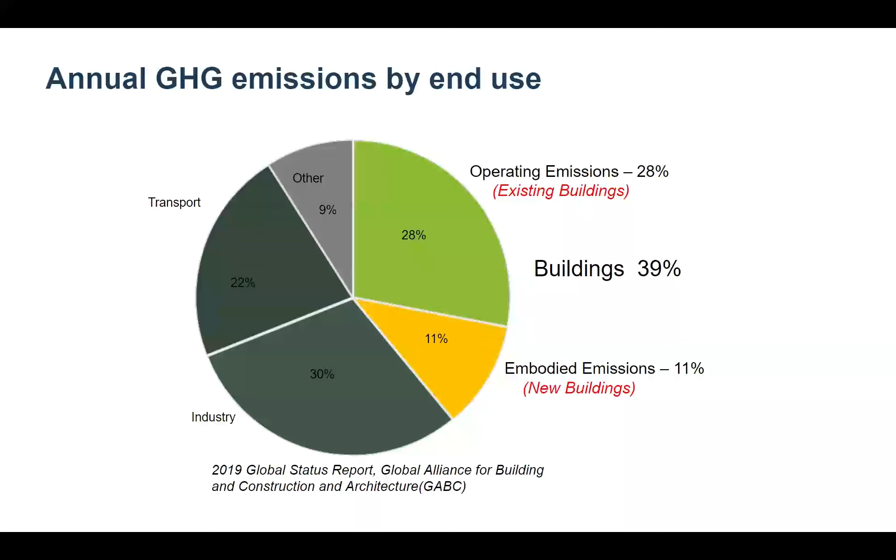So existing buildings have a really big impact, not to mention that we have a ton of buildings. We currently have 235 billion square meters of buildings, and each year we're adding another 6 billion square meters to that. So the existing buildings are not very efficient. We can't afford to replace all of them. We can't afford to leave them alone.

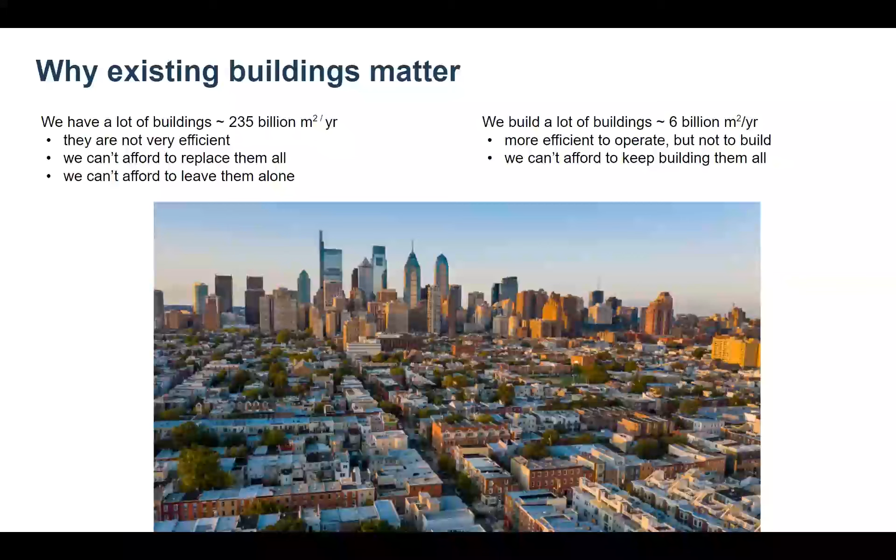The new buildings add new embodied carbon. So obviously it's very beneficial to preserve old buildings and reuse them as much as possible in terms of embodied carbon, but also for economic benefits. So you can see here on the left of the chart is new buildings. So new buildings contribute about 11% to global GHG emissions for embodied carbon, but only less than 0.05% of operational carbon, because new buildings are much more efficient in terms of their mechanical systems and emissions.

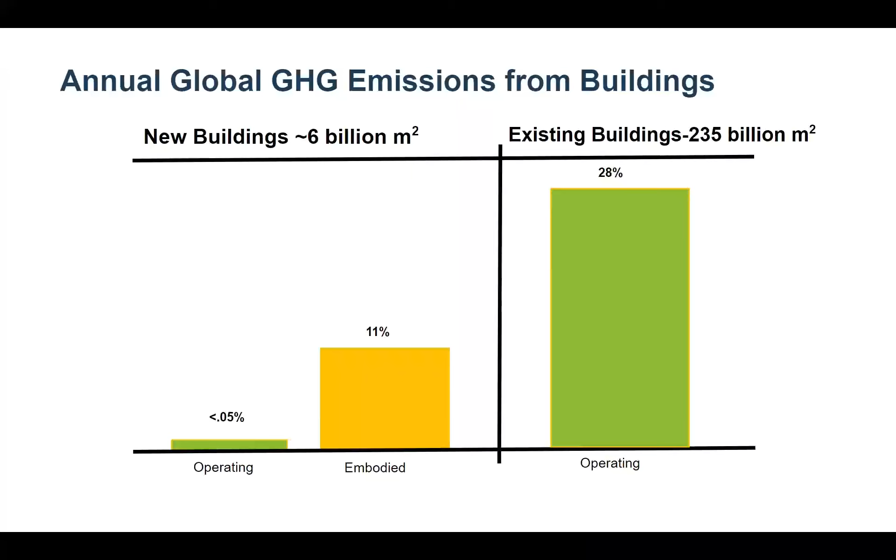Existing buildings, on the other hand, because they have old, outdated mechanical systems and maybe are not as efficiently run, have much higher operating emissions. They're contributing a big chunk of, in fact, all of that 28% of emissions. So now I'll hand it off to Irina to walk through this compliance pathway in detail with you.

Hello, everyone. So Sarah, next slide, please. So as Abida said, my name is Irina Brausman, and I'm a supervising architect with California Building Standards Commission. And I'm here today to talk a bit about building reuse scope. And even though it was presented as a third pathway in this series, we call it Pathway 1. So I will keep calling this Pathway 1 for this presentation.

So the scope of building reuse regulations is basically identical with the scope for two other pathways, the whole building LCA and the prescriptive GWP compliance. And the only difference is that the building reuse option is obviously not available to new buildings or buildings where added area is significantly bigger than the existing area. And these regulations are only applicable to quite large-scale projects.

So effective in July, that will be 100,000 square feet and greater for non-residential projects within BSC authority, and 50K and greater for public schools and community colleges. It will drop for non-residential buildings within BSC authority to 50,000 square feet, but that will happen 18 months after this July. So there is time for adjusting.

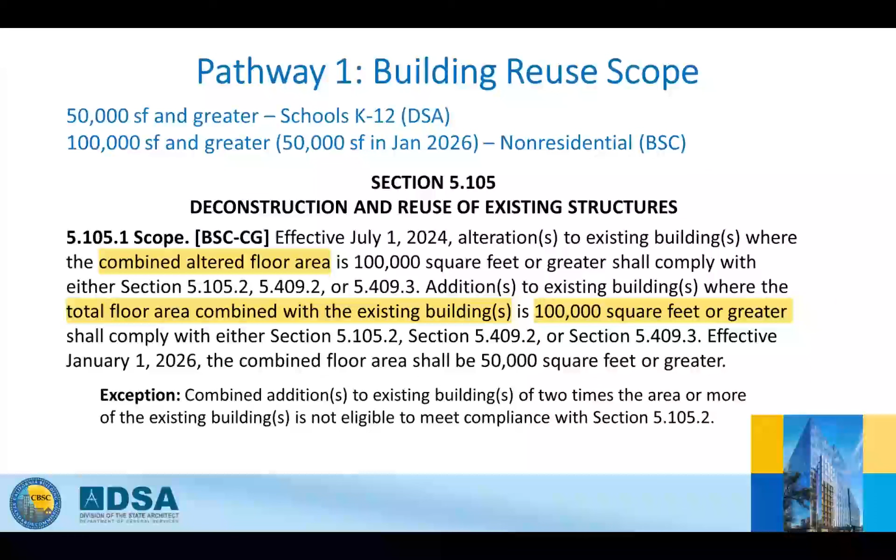And several things to note on this slide. So the project area considered in the application of these regulations: for alterations, it's combined altered floor area. And for additions, it's actually total floor area combined with the existing building. And that is really important to remember when we look at the examples in the next slides. So next slide, please.

So with the calculations, we combine altered floor area of the two suites, and we get the result of 110,000 square feet, basically 50K plus 60K, and that is over the 100K threshold. So the work in both altered suites has to comply with either one of the three available pathways. It can comply with building reuse, whole building LCA, or product GWP compliance. The next slide.

On example number 2, we have a commercial building of 30,000 square feet, which is proposed to have two additions, 25,000 square feet and 35,000. So in calculations here, the total area of the additions plus the area of the existing building is 90,000 square feet, which is less than the 100K threshold, meaning the project is not required to comply with any of those regulations. So if the design team decides to comply with them, they are of course welcome, but it's not required. Next slide, please.

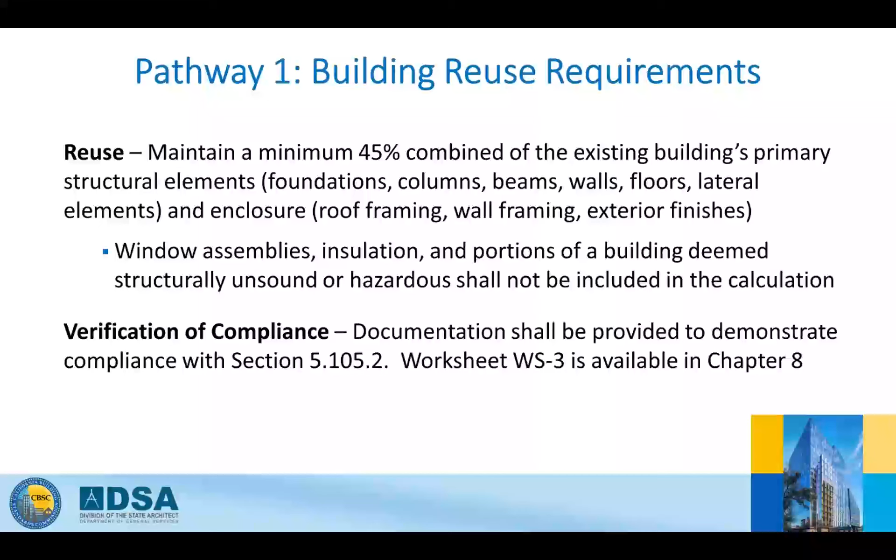So here is example number 1 on how to demonstrate compliance of the project. We have an office building of 50,000 square feet that is planned for the following scope of work. There are alterations to 35,000 square feet that do not affect the building primary structural elements. The existing building enclosure is mostly maintained, but existing window assemblies and insulation are being replaced. Then there are additions of 10,000 square feet and 80,000 square feet. And last, 15,000 square feet of existing structure is proposed to be demolished to result in a U shape of the building to provide more natural light.

So the first step calculations are to determine if the project actually has to comply with the regulations. To do that, we take the total area of the additions combined with the existing building area, and the result is 140,000 square feet. So this project is required to comply with one of the 3 compliance pathways available. Next slide.

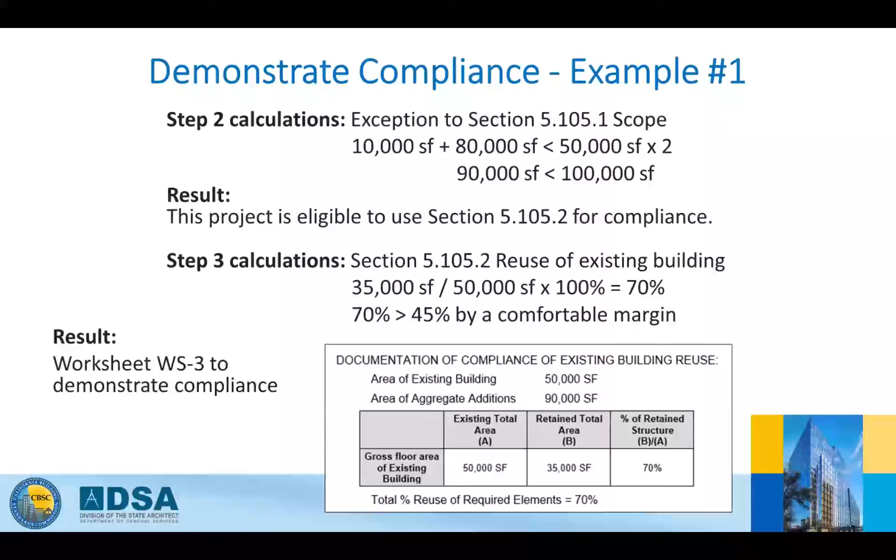So here we have example 2 for demonstration of compliance. We have an office building of 50,000 square feet, and that's planned for the following scope of work: alterations to 25,000 square feet that do not affect the building primary structural elements, additions of 10,000 square feet and 40,000 square feet, and demolition of 25,000 square feet of the building.

And again, same steps. Step 1, we determine if the project needs to comply. The total of the added area combined with the existing building area equals 100,000 square feet. 50K plus 10K plus 40K, basically. And the project is required to comply with either one of the compliance pathways available. Next slide, please.

So here in step 2 calculations, we again determine if a building reuse option is available for this project. As the combined added area equals 50,000 square feet, which is not greater than double the area of the existing building, the project is eligible to use the building reuse option for compliance.

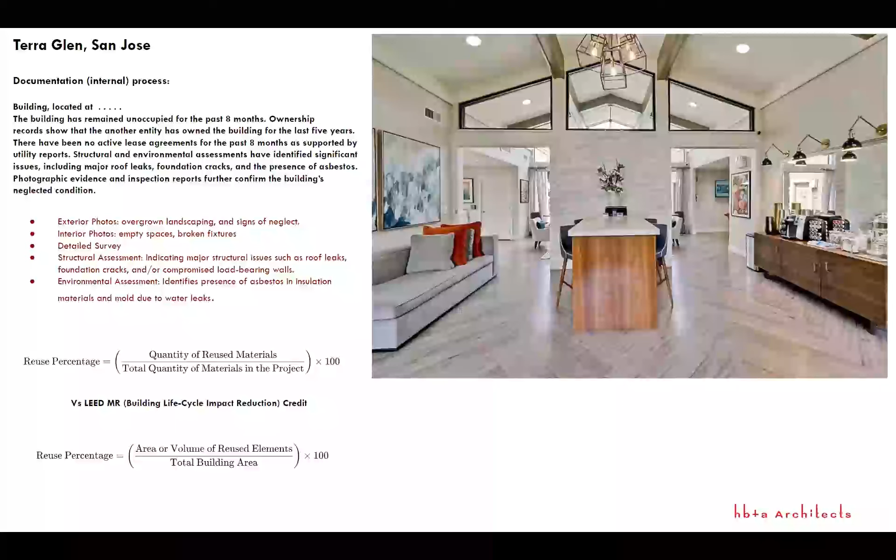This is another example of an original construction from 1971. The existing occupancy is storage. It was a warehouse construction that was converted from an S to a B occupancy. It's a typical tilt-up concrete construction with large bays on a 6-acre site with a 4-ply built-up roof. And it supported the demand for commercial spaces in the area.

And as we all know, going from storage to commercial, some of the problems we dealt with were comprehensive full compliance with accessibility codes, which does become a bit of a cost implication for clients. Energy updates for Title 24. Also, ventilation rates were improved based on ASHRAE 62.1, just to improve the indoor air quality of the space so it can have occupants. And with the entire 100% of the structure, the tilt-up concrete was used along with the flooring. Next slide, please.

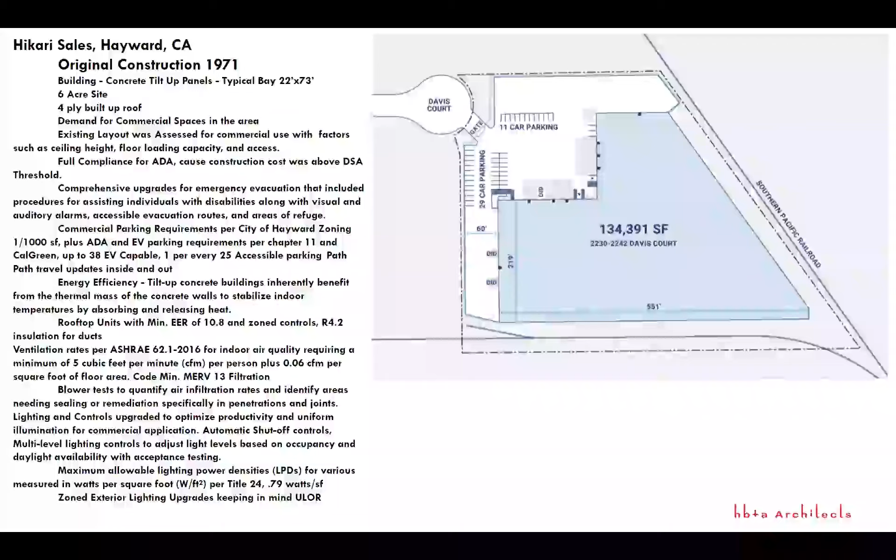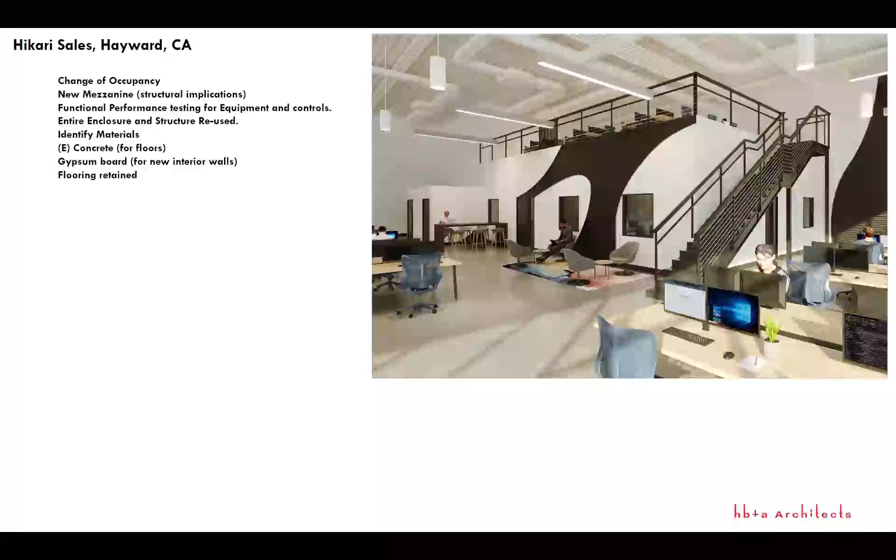So the client requested mezzanines to be added. This finished construction in 2022. The heights were 24 feet, so we were able to accommodate the mezzanine request. And full lighting upgrade, full FLS upgrade for fire life safety, bringing the whole structure to the current CBC code, which was 2019 for this project, along with ADA compliance, egress compliance, and making sure that the IAQ was improved because of the ventilation rates. Next slide, please.

So if you were doing this project today and you had to comply with the July updates, you would basically include the WS3 form in your sheets. So for the primary structural elements of existing buildings, which includes foundations, columns, beams, walls, floors, and lateral elements, for this project it would be 100% retained structure with existing area added to the retained total area A plus B. And then for the second row, which says existing enclosure of existing building, like roof framing, wall framing, exterior finishes, all retained. So for both of these, the last column would say 100%, which will actually qualify for more than what the CalGreen updates are requiring.

So the reason why I wanted to include it is that despite the fact that we had to bring it up for local zoning requirements for parking, which is 1 per 1,000 square feet of commercial space, and show EV parking and show full compliance with ADA and accessibility standards for parking, the structure and the flooring and actually 100% of the enclosure was retained. Next slide, please.

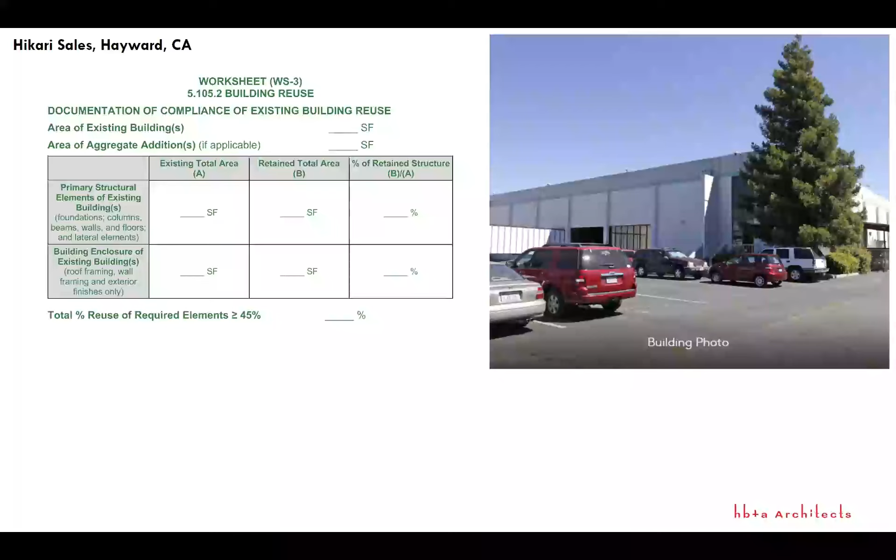So here's a rough summary of our calculations for embodied carbon. The steel for the mezzanine, which covered roughly 10,000 square feet, and we used HSS, non-fabricated, which has 1,710 kilograms of carbon dioxide equivalent per metric ton. You can see the percentages next to the concrete that was reused is negligible. And then the other big factor that I included in this rough calculation is gypsum board for the individual spaces that were created, and the embodied carbon GWP percentage of that is 16.90, compared to the reuse of concrete, which was at 81.33%.

So this just kind of shows you that just by retaining the structure and the enclosure and changing the occupancy of an existing building, which was vacant, helped us to advance our plans toward embodied carbon reduction measures, and yet have a commercially viable building. But be aware that we do need to comply with the current codes for energy, for accessibility, for fire life safety, and bring it up to current codes, which can be cumbersome, besides the documentation process for the enclosure and the structural elements of the project.

And so that's all I had to cover, just to show that it's doable, completely doable. It is a little bit harder, but it's totally doable, and the advantages go much farther along. So that's I think all I have, and with that, I'll pass it on to Isabel for her example.

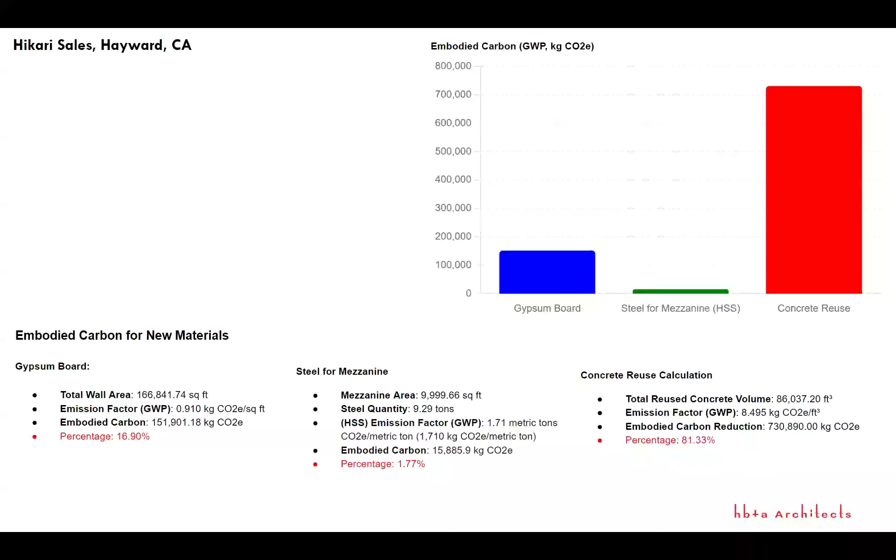Yeah. And then we just wanted to end with an example that might be familiar to a lot of you. It's Horton Plaza in San Diego, with a really large building area, mixed use program. And we just wanted to use this to show that with significant reuse of the substructure and superstructure of an existing building, you can achieve really high reductions in embodied carbon.

So for example, for this project at 100% CD, we did the calculation of if the building would have been all new construction versus the design that the team came up with, and we were seeing about a 73% reduction in embodied carbon. So much more significant than anything you would typically achieve with typical embodied carbon reduction measures for a new construction project with the LCA pathway or with the prescriptive pathway. So this is just to show that this pathway really has a big real world impact and can result in really cool final projects.

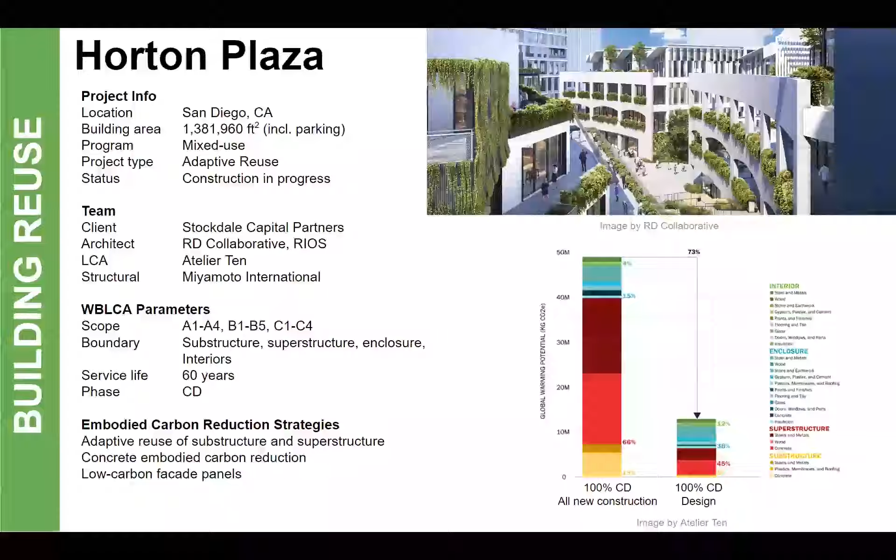But in terms of the spatial scope, a lot of the questions touch on what constitutes a building for this specific code, and for looking at these area thresholds. So what, for example, if you have one building, but there's two alteration projects with two different permits, or if you have a development that has multiple buildings within it, or if you have a project and you don't want to meet the code and you say, oh, I'm just going to split it up into smaller projects that are all under 100,000 square foot. So maybe Irina, you could talk a little bit more about how this spatial boundary is defined.

Yeah, so currently, there is no clause for the split of the developments. So basically, if the client or design team wants to split the project to avoid those regulations, they can. I mean, that's possible. And there was a question about if we envision adding that clause in the future. That's possible, because these regulations are just the beginning. That's the first time we added those type of regulations. So we want to go easy on project teams, on the project owners, and we considered all of that.

So yeah, we currently go easy, but the regulations will most likely be developed further for next code adoption cycles. And it's a possibility that this clause will be discussed. I can't say for sure, but that's possible. And if people are interested in that, at some point we will have workshops in one of the future cycles.

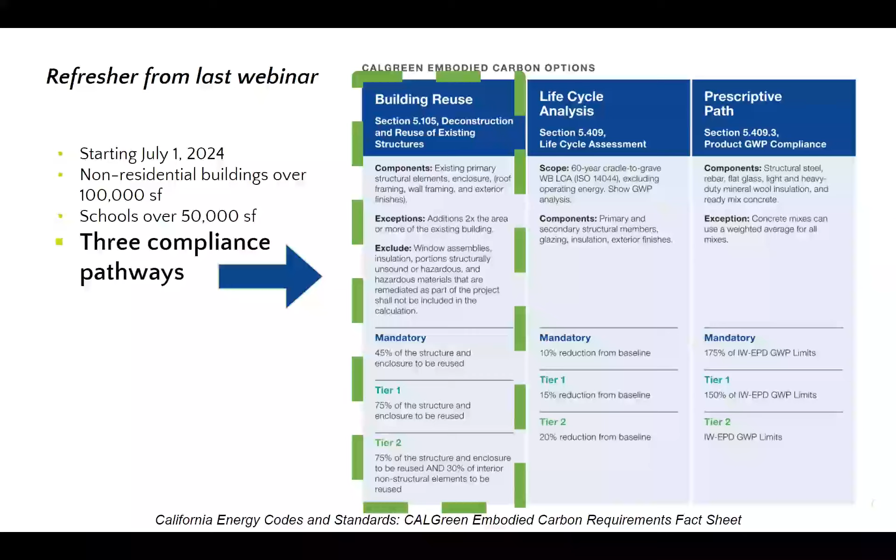One question asks if we could go over in a little bit more detail how we would calculate the areas of components. Irina had a good example. Maybe we can just go back to that briefly and expand on it a little bit since we have some time. So yeah, that will be the last slide in my deck. Yeah, this one.

So basically, for different elements, you would consider different areas, but that's the surface area. And for columns, that is the surface area of a longitudinal column face. That's a recommendation, because again, there are no requirements currently on how to calculate that. That's up to the project team to get to that point and get an agreement with the enforcing agency. So if you come up with other ways to calculate that, you just need to think in terms of: do not compare apples with oranges.

So if you start calculating surface area of longitudinal column face for existing elements, then you will need to do the same for new elements and existing elements that are demolished, so you compare the same things for the same items. So that's the gist of that. And for walls, that's obviously surface area on one side. For slabs, gross floor area. But again, all those are recommendations, not requirements.

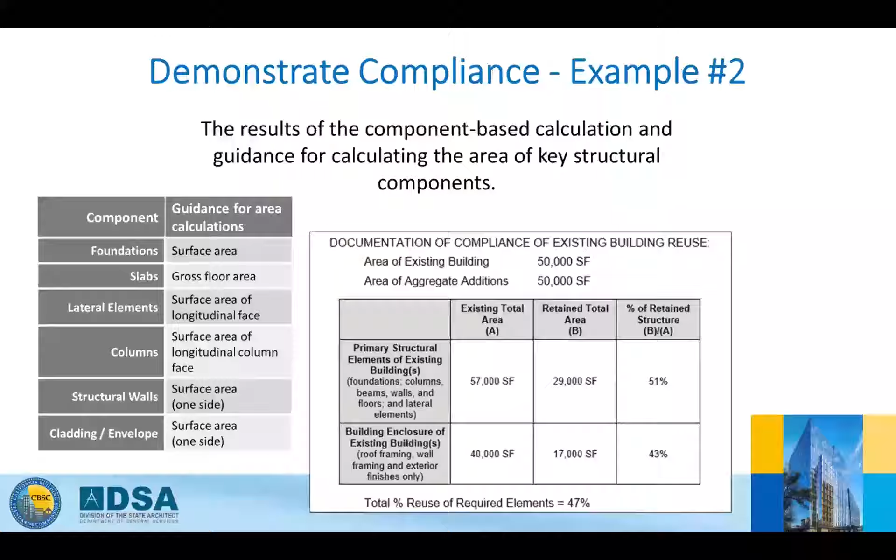Great. Is there any sample for compliance workflow? Compliance. And the person mentioned the sample that was provided for Title 24. I'm confused about the question. Yeah, slightly. Maybe she can elaborate.

Okay, the next one is, do interior projects need to comply with any of the pathways? It depends. In an interior project you can demolish almost all the existing structural elements that keep the building together and add new ones. So it depends which structural elements you are keeping and which you are demolishing. It doesn't matter if that's interior or includes exterior. That all depends on the structure and enclosure that you are maintaining. Isn't Horton Plaza an interior concept? Isabel, maybe you could touch on that a little bit, because I remember on that slide it said interior only for materials and the embodied carbon.

I think it would depend on the size of the project again, whether it's interior or large, because if you are maintaining the structure and the enclosure, like in the two examples I showed, they do tend to become interior only. But in one example, we retained the entire enclosure and structure. In the former example, we retained only 65% because it needed significant energy efficiency upgrades, and ventilation rates were updated, etc. So we had to go in and basically cut it down to studs, improve the insulation, improve the vapor barrier, and on the exterior side, the stucco was completely replaced by bamboo, which is a biophilic material. So I think it depends on the size of the project. Yeah, for Horton Plaza, there were some envelope upgrades, so it wasn't just interior. But there are examples in both camps.